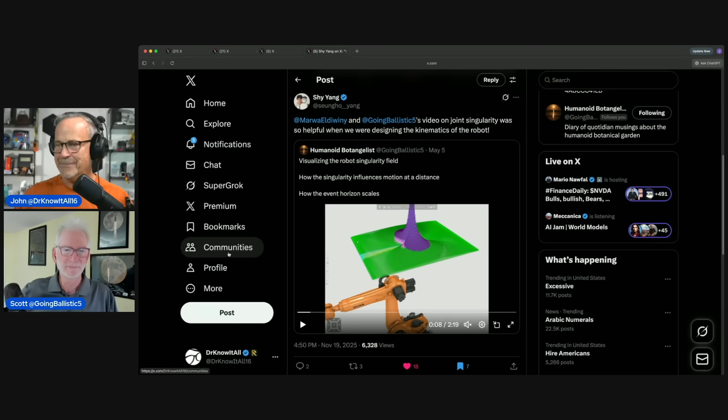He said that as they were developing this robot, your video from back in May was very, very cool. So you left me speechless, which is hard to do.

The last thing I was expecting was getting a shout out from Sunday Robotics, because they were having quite an outstanding Wednesday that maybe started out a bit slow. There was a certain hype about the reveal that was coming, and there was a short, really well-produced, almost like an ad for it, that left most people thinking it's just like all of them, just these selected video clips, not anything. Then the long clip came out, and everyone's jaw dropped because suddenly you were seeing the long horizon and everything it was doing. And to know that I had anything to do with the design decisions is pretty cool, right?

Yeah, it's pretty cool. What's nice is it gave me an opportunity to have a little dialogue with, I don't know if it's she or shy, about some of the things that they've done. It turns out he designed the base too, and the reason is he's formerly of Matic, and Matic is probably the one that made the first automated vacuum cleaner actually worth purchasing and using. So it's got a pretty good pedigree. That's a good call out to them.

If you haven't seen that video, I'll leave it up here and at the end of this. The Matic vacuum is excellent. Really interestingly enough, the first thing I thought when I saw this was, oh, this looks exactly like a Matic vacuum, extended out into sort of human form.

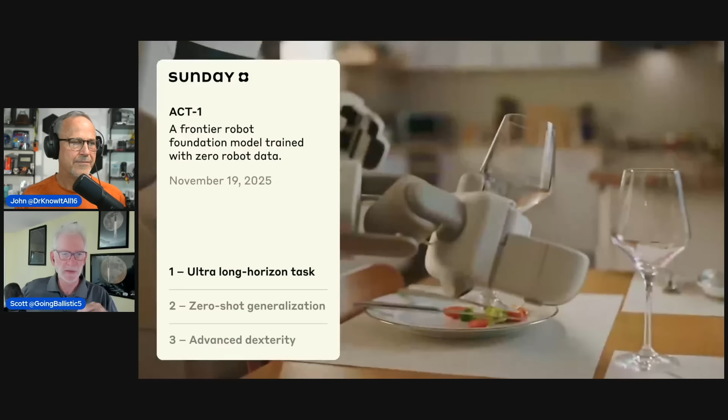That is quite the twist. So it is. Go ahead and play this, and we'll give everyone a little bit of the history of Sunday Robotics. You wonder, who are these guys? Where did they come out from, absolutely out of nowhere?

It's like they're actually a very well-known quantity. I'm thinking it's a little over 2 years ago that we saw the Aloha project. Basically, the Aloha project was a bunch of Stanford grad students that sort of shocked the world with how easy it was to start training robots to do tasks that were way more complex than you thought, with a very small amount of real world data.

Not like thousands of examples, but literally like 100 or less, and you're already getting 80% accuracy. And not only were they able to do that, but they were just using some off-the-shelf hardware with a really crappy end effector. With just a 2-finger gripper, they were able to do things like zipper a jacket, tie a shoelace, do a bunch of tasks that you would have thought was not possible.

So it changed the mindset two ways. One, my goodness, we can actually make these bots seem to be really intelligent, doing something — the hardware doesn't have to be that sophisticated. And it means that the solution to dexterity is more about intelligence than it is mechanics. You can have a really good hand, but without the intelligence to go with it, it's going to be completely useless. So you can have an adequate hand and be able to perform a lot.

The other thing was they learned a lot about how to capture data. Yeah, that is really big. And the Stanford Aloha robot almost is like, it's not an exoskeleton because it's much more primitive.

Well, it was basically two off-the-shelf telerobotic arms that you could buy — I think it might even be $6,000 arms, so they were pretty inexpensive, maybe $5,000 to $7,000 an arm. And then they also had the arms that you could use kind of like an exoskeleton the same way. So it was this idea of a leader-follower situation where you would move one arm and the joint values and the encoders from that would go straight to the other. And the operator was there very locally watching what was going on.

I'm sure it was tedious trying to gather the data. Right, in this case, they've got a very clever solution.

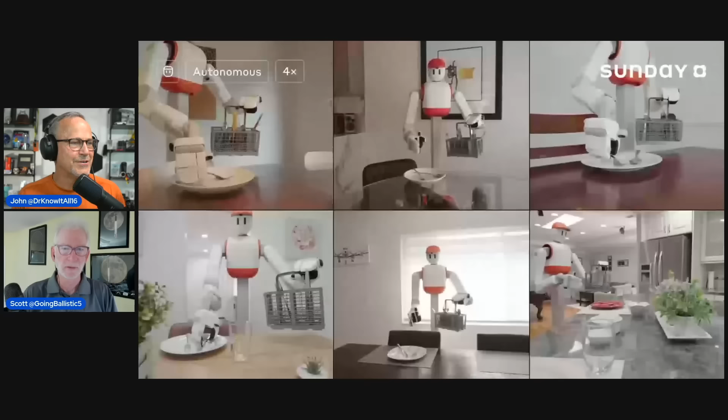Now they're showing the diversity of new environments that it had not seen before, so that it was confident enough that it could go in a new environment and be able to perform the task just as well. Now, the thing about it is the design aesthetic is kind of great.

Everyone might think like, are those eyes cameras? No, they're not cameras. Why is it wearing a hat? Well, it turns out underneath the brim of the hat is the actual camera that they're using, which allows them to get out a little bit. So there's actually a reason for the brim.

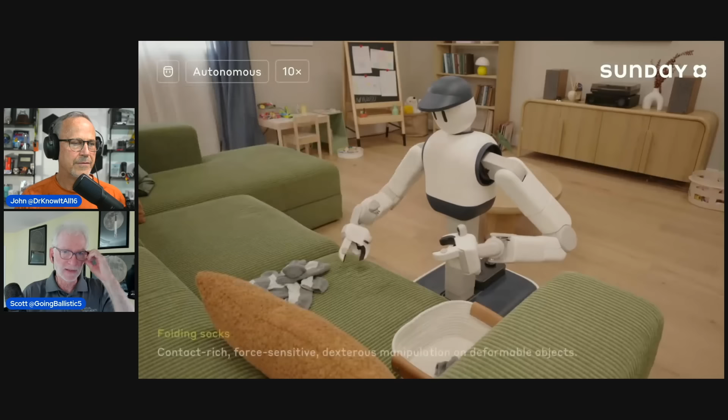The data capture is really interesting because you'd look at that hand and say, well, that must be very difficult. But even with a really good human-like hand, there are not good tele-op systems to be able to get the haptic feedback and the control that you would like to have. So everyone is really fighting over that.

And they took what is probably the simplest approach. They made a glove which is almost mechanically identical to it, with all the exact same sensors and everything. So one of them is the robot hand, and the other one is what a human operator will slip on, and the human operator will then perform all these tasks.

It's got the camera built in, absolutely everything. So it's more or less like, make the robot arm, just slip something on so they effectively have it and get all the data there. At the same time, they're wearing a camera to get the robot's eye view of what's going on, and they're able to do the mappings that are necessary. So it's not that important that a person has to be of a certain stature or size.

It's a low cost solution compared to many of the others. It's not something you can just go and buy at Best Buy and have anyone get it. You'd probably still have to ship it to them, but it wouldn't cost a lot. My understanding is they have maybe 200 people scattered around the country using things to help gather the data.

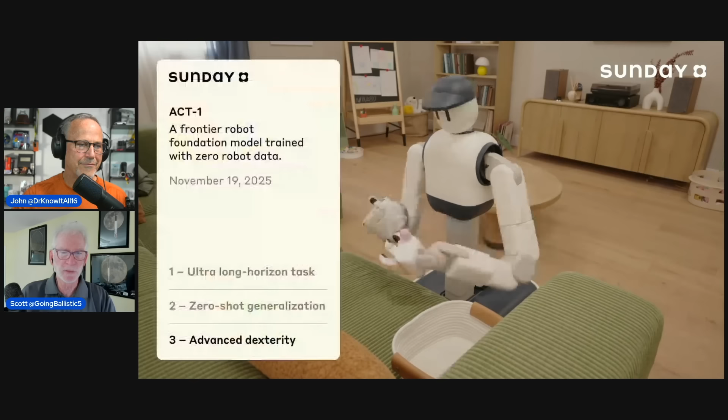Yeah, exactly, because their hand was much more primitive than this one, and they were able to do quite a bit. By the way, the socks at the end of this video are very impressive. That's what blew me away. The first thing they were showing at the beginning was that long horizon task, a very long task that a lot of robots are really bad at. They're very good at a simple, repetitive task, but here, from a single camera, the whole task goes back and forth, having to do a variety of different things and do them correctly.

That was amazing, as well as the persistent attempts to do something, because when it went in to get the soap capsule, I have a hard time doing that too. I don't always get it on the first try, and it took a little bit longer than I did. It's like fishing.

It's wearing ski gloves, so it's having a hard time, but eventually it gets the right sensation of what it needs. It knows it has it, goes over, puts it.

I think I have a dishwasher exactly like that. That start button is like the hardest one to find, not very easy to get. And then you're never sure, is it really on or not? So I wonder how they get that feedback.

Some of these things have Wi-Fi capabilities, but you can't trust that all of them will have it. Every single Airbnb is going to have a slightly different dishwasher, so it'll be interesting how it can say, oh, it's a Bosch or a Whirlpool, and behave a little differently to make sure you do it right - some of them have 3 racks, and deciding where the silverware tray goes, which side, the front, all that. These are going to be very interesting in how you adapt to environments that are a little different.

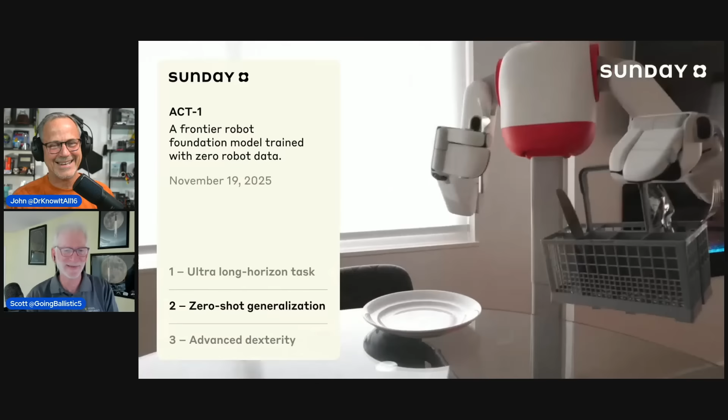So you just wait, and they're very quiet because they're German - you wait to hear the pump, and you're like, oh, I hear the water running. The modern dishwashers aren't like the old ones where you'd twist the knob and shove it in and it would make so much noise.

But you can see the long horizon task, and this is multitudinous different scenarios they have not trained on. So the bot is able to manipulate objects similarly, picking up silverware, but in all different environments. So this is very impressive as well.

Now what do you think of the base and everything? The first thing I thought was it was a Matic, which makes sense - this is where we get to the good enough robot, because clearly this robot is not going to go up and down stairs, couldn't even go on the front porch to wave at you because of a little bump, unless it can handle small bumps like a front door threshold. So it's got limitations, but either in the home or in the factory, most of the things it's working on are going to be flat floors, for the most part.

And within that use case, it's highly useful. This would actually function as a vacuum cleaner too, since it should be able to pick up a battery operated vacuum - or I'm almost wondering, should they just build one in? As it's going around, just go ahead and vacuum at the same time, multitasking, always vacuuming. So there you go, I like that.

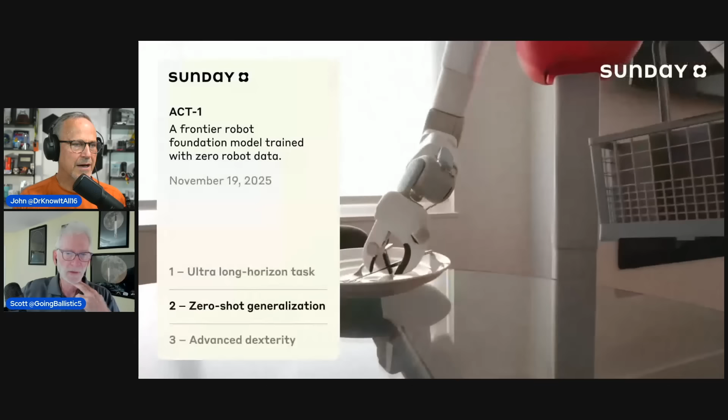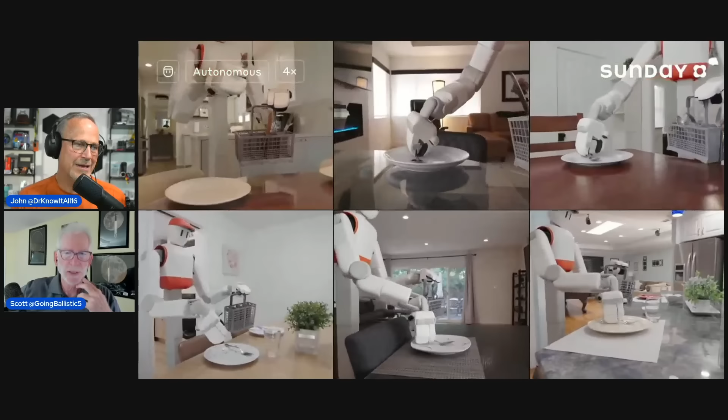The one thing I was looking for in this video was to see if there's any... I can tell there's carpeting over there, but I don't think it actually interacts with that carpeting, so I don't know. It's possible - it should be able to handle that. And obviously the base must be fairly heavily weighted, because as the bot leans forward, there's a lot of...

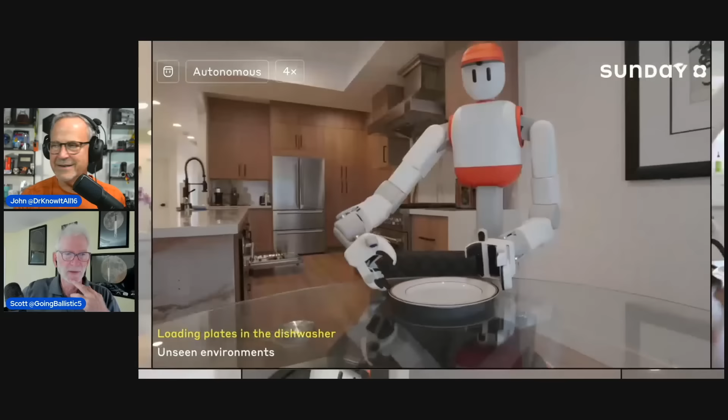Now I was surprised at the weight of the bot. Do you have any idea how heavy it is? I did not see that. See, the thing with all these companies, just go to their website and you'll be surprised how much information you'll find there. So it weighs 170 pounds.

So a lot of it must be in the base. It was more than I expected - looking at everything else, I thought it might almost be like a Neo class as far as weight. But it turns out it's about the same as all the other humanoid bots out there. So a lot of it is probably batteries down in the base. It has like a 4-hour runtime, and I'm sure they made sure all the actuators and stuff were positioned to get everything as low as possible to keep it from being tippy.

You would want, if somebody came along and not purposefully, but kind of bumped into it in the forward direction, that it wouldn't just tip over. I'd like to see exactly - I don't know if there's a tipping standard or how you measure something like that, but how much force you would need. Obviously when it's down low like this, it's not a problem. It's only when it's up very high that you'd have that fulcrum, that moment arm that would allow you to push it on over.

I mean, this is impressive. It's really impressive, just being able to do that fold in like that. I cannot believe you can do that with those hands. Exactly, so when you see these tasks you change your initial impression. You go, oh, there's no way you can do anything with that hand, there's just no way you have that dexterity. And then you realize, wow.

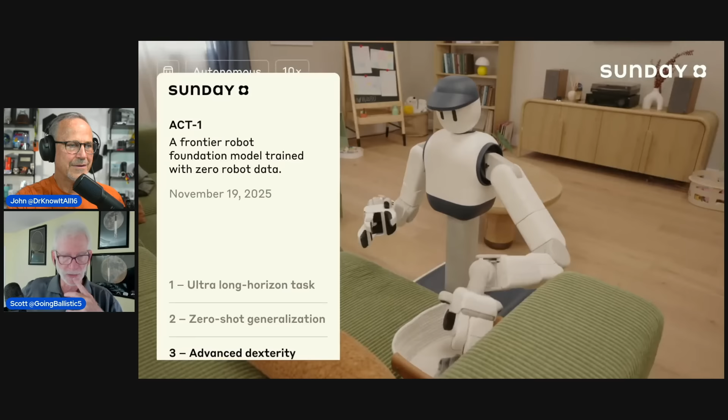And they can get out of the way. It seems to be quite useful in being able to grab things, move them around. I'm not sure exactly what the payload is, but it's really quite adequate.

And that's the advantage of having the gloves that the human is using, is it's getting exactly the same touch data, which is why they were able to do it without the robot. So all they had is these hands basically floating in space. And from that, they were able to say, so in order to get the hands in this position, there's a little camera on its thumb, right next to its thumb. Yes, so it's able to see very, very clearly what it's manipulating, which is a huge advantage.

Now, the operator is wearing a cap of some sort that has a camera on it, and so you can use that as the initial guess of where the robot's body should be. But then you probably do some adaptation to say, well, the robot and the person aren't quite the same, so their arm links are a little bit different. Then they do a little bit of a transformation, and from that they get the full body control.

So one of the things they were showing with the dishwasher, when that was going up there, it wasn't like statically there with the arm moving it up. Everything was moving - the base is moving, the lift was going up and down, the arms all at the same time to do that. So, great full body control.

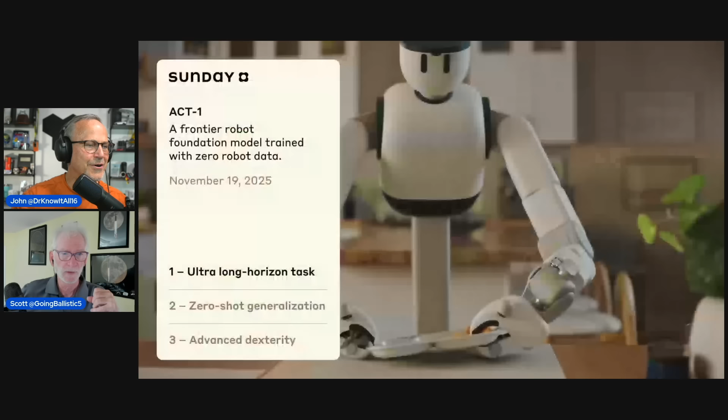Yeah, so let's see, back again, rewind. So are there any moments that you want to call out in particular here? Because it's a long horizon task, you kind of have to look. I didn't have time to do this, but I wanted to actually - because a lot of this is 10x - pull it into a video editor and then slow it down 10x to see.

I have a feeling, because I know exactly how fast my Matic operates, I think it's like 1 meter per second is what they said is the run speed. They did say something that - and this is probably the improvement - is that the humans were only able to teach the task at about 60% of normal human speed, since wearing the gloves impairs you and slows you down a bit. And then it sounded like even from that data, the bot might have been another 60 to 80% slower than that. So there would be a lot of places to improve it on the data capture.

So let me ask you a question, because the reason why most humanoid robots with legs are so slow is because it takes a lot of time for the actuators to manipulate its legs. This has wheels, so why do you think it operates at this speed? Do you think it's the brain that can only operate at a certain rate? Oh no, I'm sure it can go faster if they wanted to, but they might be limiting it. A lot of AMRs can go maybe up to 2 meters per second, but they're usually limited to 1.2 on factory floor settings, and they might be saying in the home, even 1.2 is a bit fast. So I'm sure they could go faster.

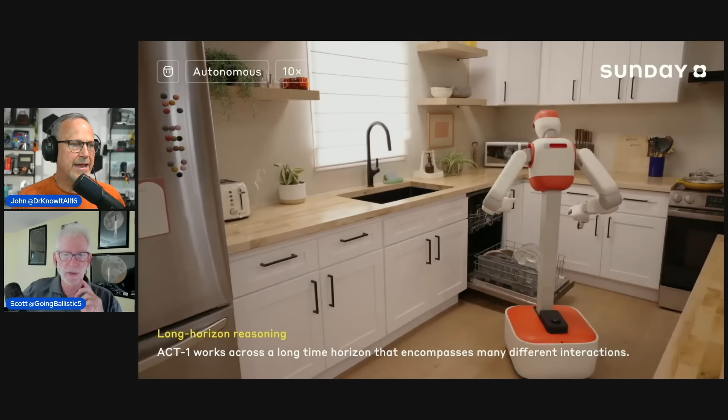And it looks like they have 6 casters. One of the engineering drawings on their website shows sort of like 3 in the front, 3 in the back. And if they're doing that, then it probably means they might have some active suspension, which would be really good.

That's one way of getting yourself out over door jambs. I don't see why you'd need 6 wheels, except that you might lift one up as you try to get over something else and pop it down to make sure you get the stability. I'm sure that could be a lot of the reason for the mass, that they're really making sure it's not just flat surfaces, but they can handle uneven surfaces as well.

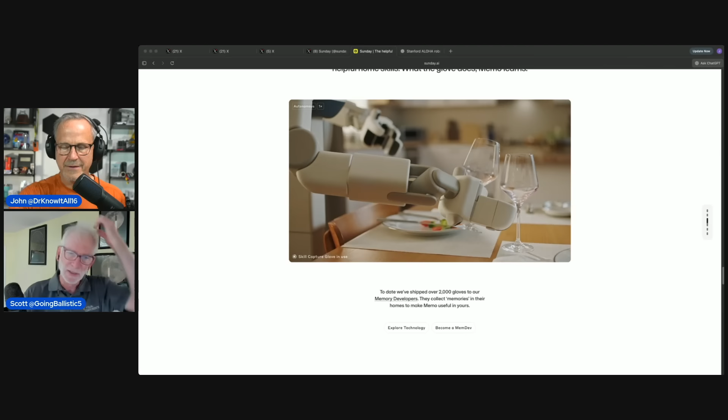So they've already distributed this. They call it their skill glove, and they call the people who do this memory developers, or MDs. The idea is that they're doing data capture, and at least 200 people around the country have been able to train it.

They have a beta program. Actually, it says 2,000, so it's an order of magnitude more. Is it 2,000 now? Okay, so I got my zeros wrong somewhere. That's a pretty significant number.

They have a beta program, which is cool, because that means people can participate. You can just get these gloves, you can probably participate now. And then let us know, Sunday Robotics, let us know how to do that. We'll put it in the comments.

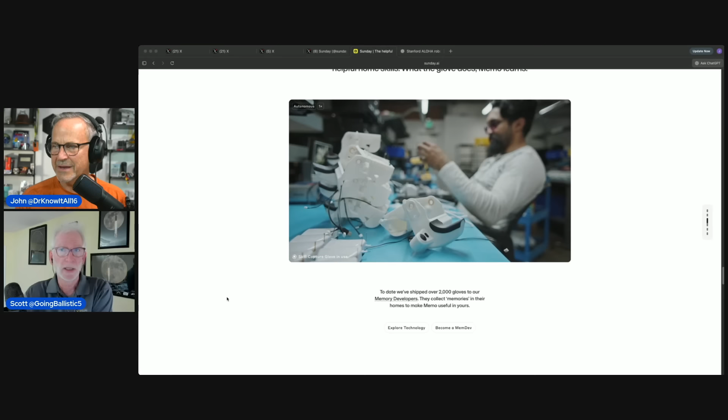So they have a beta program that they'll start shipping at the end of 2026. I think it's going to be a select group, but probably pretty small. I think they said somewhere on the website it might be like 50 people or something like that. So it's kind of like winning the lottery at this point to go out there and start doing those deployments.

The interesting thing they mentioned is that they use Airbnbs to be able to get diverse data sets while moving around. This is something we've talked about before, and I think the smart way of doing it is you hire a bunch of interns to collect data on certain things, tell them what they have to do, and offer them lodging as part of the internship.

And the thing is they have to move like every 3 days. They live there for 3 days, go through, capture as much data as possible, and then move on to somewhere else. It just seems you could tie that in with Airbnb, because I'm sure there are a lot of Airbnbs unoccupied for certain times of the year or months or days of the week.

They can start filling those places up just by coming up with some sort of program as an incentive, or a coupon that comes along with it, like a discount from Airbnb so long as you use it for that purpose. I could see a variety of ways that using these kind of limited timeshare areas, data could be collected really quickly, because you'll get diverse data sets. Or the alternative would be to have a rental program to some extent.

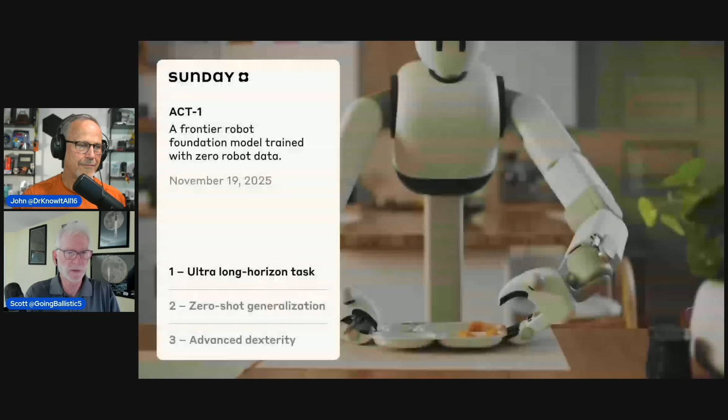I was thinking about Alaska versus Florida at this time of year. The lighting is going to be highly different between the two. It's going to be dark outside all the time in Alaska. Some colder places might want carpets because it feels warmer. Also, homes that get drafty in the wintertime will have more door jambs, or not such an open floor plan. So you may not realize the variety you have with geographic disparities.

Yeah, I noticed that when you just got back from Michigan, the houses just look different. They look a little more hunkered down up north because it's cold, so the houses are just a little different form factor. And the amount of glass you have is going to be different too.

This can't go up and down stairs, so it has the same limitation as a robot vacuum or autonomous vacuum. Whether it's robot or autonomous, it can't go up and down stairs. So if you want it to vacuum upstairs or the basement, you have to physically carry it there. You're not going to do that at 175 pounds - it'll be more difficult. So you would need an elevator that would allow you to get up to upper floors.

Yeah, so that's always a limitation when you don't have legs, but again, the main floor is where most of the stuff happens - the laundry room for most people, the kitchen, the dining room, the living room. So those areas, that's what it would be really, really good at handling.

And so again, this thing comes in different colors already - we've seen at least 3 different colors, so there's probably at least 3 bots. I think there was an image showing at least 3 of them. So we know they've built a couple, and there's nothing to prevent them from eventually producing a legged bot if necessary.